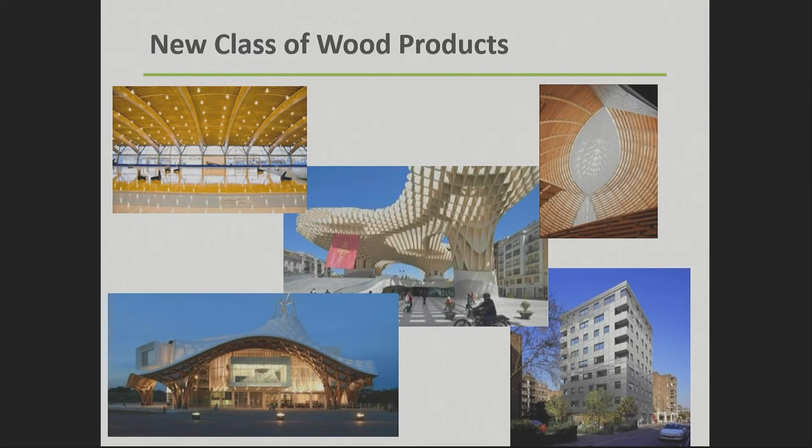The engineering software we have to model this nowadays is leaps and bounds beyond what we started out with. I actually started out hand drafting, so that gives you an idea how far back I go. Now with computer programs, you can just plug it in and it spits it out. It's like, oh, that's great.

So CLT is kind of the new word. It's cross-laminated timber, kind of the buzzword out there. But we're doing a bunch of NLT, nail laminated timber, just 2x's on edge. Lots of glue lam gets involved with these. And then LSL and LVL are big billet products.

So the demand for lower impact structures, the environmental footprint, is literally off the chart. It's so funny when people start running their life cycle assessment, figuring out the impact of the materials going into their building, and they actually run it and see like, whoa, wait, what? It's like 16 times, 24 times. On the water pollution part, wood is 1,900% better than steel. It's dumbfounding when you actually sit down and look at the numbers.

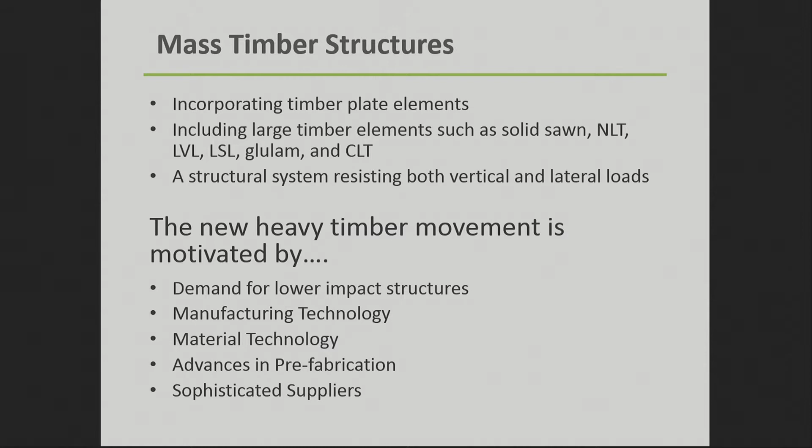Manufacturing technology, you guys have maybe followed D.R. Johnson, how they've gotten up and going. Valerie one day said to me, they went over to Europe and looked at a lot of the machinery and stuff, and they just didn't realize how far behind we've gotten in the United States. So now they have one of the top of the line CNC machines down in Riddle. I'll show you a picture of the press and everything. And material technology, that's advancing also.

So nail lam timber, we've been doing this all day long, a bunch of 2x's nailed on edge. It's a great product, very inexpensive if you've got cheap labor. That's where some manufacturers looked at making NLT in the rural areas and shipping it to the more developed urban areas. And LVL and glue lam, we've been doing that forever, and CLT is kind of the new kid on the block.

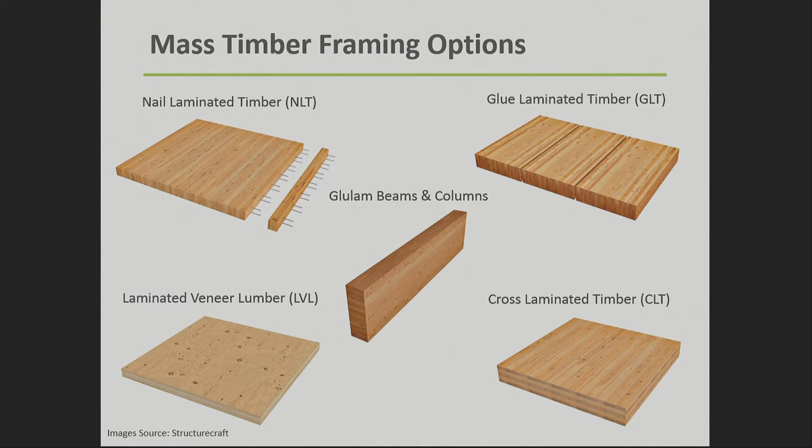So we're doing a little bit of everything. We're doing post and beam, glue lam posts, glue lam beams, mass timber floor plates, even just 2x6, 2x8 light frame with mass timber floor systems. And in non-seismic zones, we actually can do full-on mass timber walls with mass timber floors. High seismic zones, we can't.

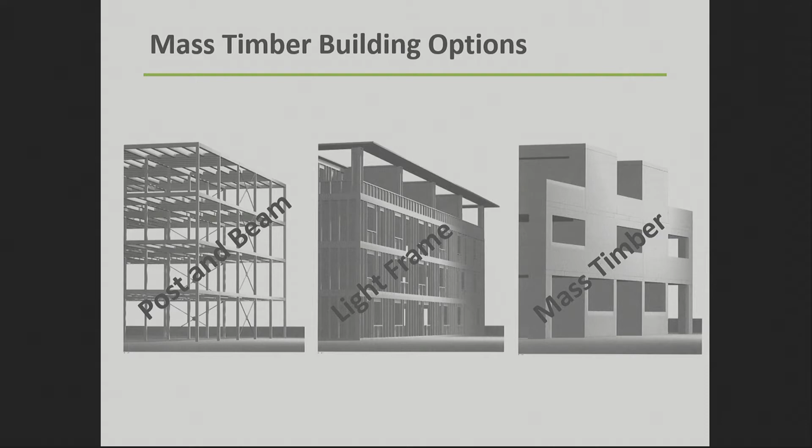One of the things that happens with this is everybody thought this was going to be really ductile and flex and bend in a seismic event, and it doesn't. It's just way too stiff. So on the 12-story, we're doing the CLT as part of a system. In that system we have steel rods at the edge that will actually flex and buckle and bend, and that's what absorbs the seismic energy.

In a non-seismic, wind-governed zone, it's super easy. The building just literally leans over and comes back. In a seismic event, it's moving back and forth, and the building can't absorb that much energy. But in a wind zone, it just leans over and comes back. That's why we can use CLT full on in non-seismic governed zones. Non-seismic is like Texas, Arkansas, Oklahoma, the whole Midwest, a good chunk of the East Coast. The West Coast, just not so much.

So here's a pretty picture of it. Again, 3-layer, 5-layer. Typically you see 3 layers on a roof and 5 and 7 layers on the floor, is what we're typically seeing in these projects.

These panels, again this is my scale model, only a 4-foot wide by 20-foot long panel. Normally these are 10-foot by 40-foot in length. So even my scale model, I couldn't make a full scale piece of the panel, otherwise I'd be carrying this big chunk of wood around. That gives you an idea how big these panels are. Typically on a building you're putting in a 10 by 40 panel, so 400 square feet every 15 minutes. That's typically what you're seeing on these jobs.

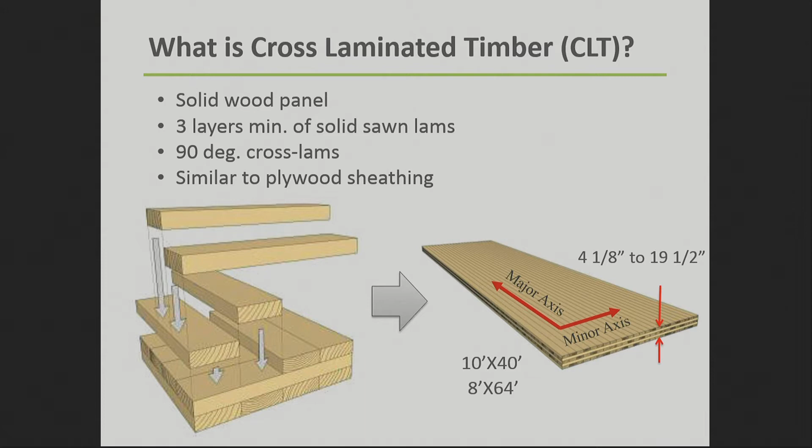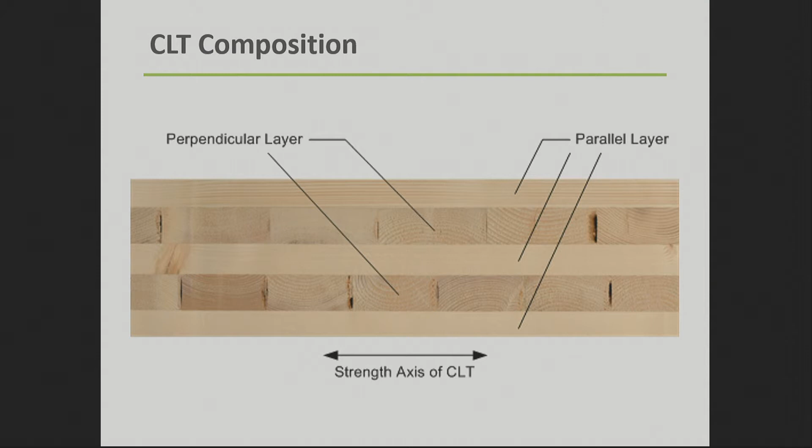The beauty is you need the strength in the outer layers. The inner layer is just infill material, and that's the beauty of it. You've got scraggly looking trees that aren't doing so well, and it's like, who cares? You need your strength in the outer layers, and this material inside can be whatever it needs to be. You can have wanes, checks, splits, things like that. Low grade wood in the middle.

It's all done to this PRG 320. The beauty of that is it's a performance-based standard. So as a manufacturer, you can make up the panel that's most effective for you.

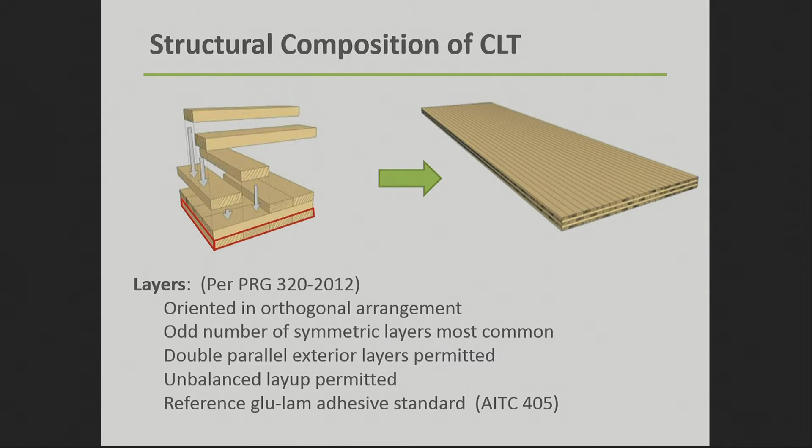Right now there are manufacturers that are—there's one doing a 6-layer panel, funny enough, because they found it more efficient for doing their fire calcs and everything. Since it's a performance-based standard, it just says this panel has to carry 100 pounds. You make the panel up. You've got their specifications in PRG 320 for how you glue it together and everything, but you just have to make your panel carry 100 pounds.

So there's not a specification that says you have to make it exactly this way. The beauty of that is it lets each manufacturer pick what's most efficient for them. It doesn't paint you into a corner to one standard.

So it's all done by APA. Again, how you've seen sheets of plywood with that APA stamp on there—it says APA 24/16 span rating, da-da—these panels are the same thing. It's an APA PRG 320 V1 grade panel. So the inspectors out there literally just go out and see the stamp on it, and you're good to go.

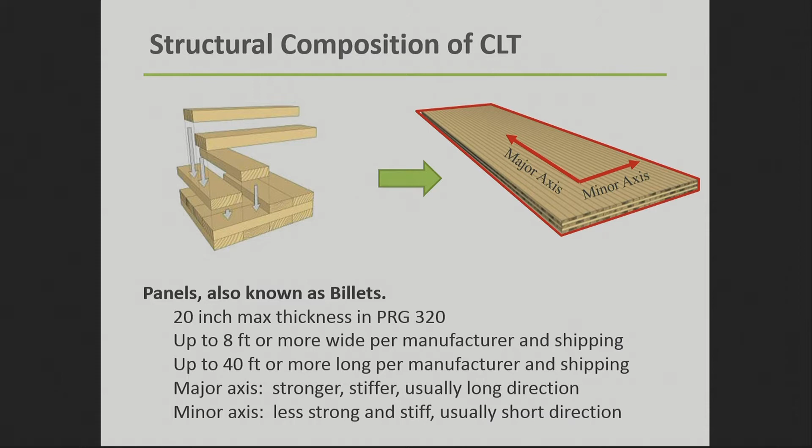There's always a strength axis and a weak axis. The nice thing is, say this was a roof system and you wanted a column out there and to cantilever this panel in a couple directions—normally we're running a beam out here to cantilever over the column, then running another beam along here to pick up this very edge. Now you just stick a column there.

This panel can actually cantilever on its own in 2 different directions. That's why we ended up using it on the roof at the Oregon Zoo, because it could just cantilever off this corner with no extra support, giving that architect the thin profile they really like to see on some of their projects. So that's been a big push for the designers.

They're manufacturing. Russ Vaagen's setting up his plant in Spokane, Washington. And then Katerra is setting up their plant in Spokane, Washington, but my understanding is they're going to keep that internal—they're not going to actually sell to third parties. So right now we've got 4, and then there's people like Columbia Vista that have been looking at it for a while. There's another group down in the southeast that's looking at it. Smart Lam just opened up a 2nd plant in Massachusetts, I believe, and a 2nd manufacturer is setting up operations in Massachusetts.

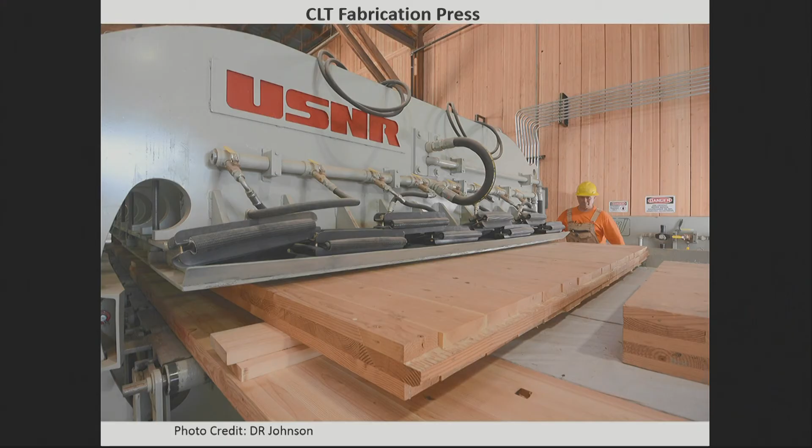So this is D.R. Johnson's press. Great story behind this—again, this is part of the governor's rural economic development deal that we were working on. One of the big pushes was using our local resources. A lot of people are getting their presses from Europe, and we said, hey, can't we get somebody in the U.S. to make a press here? So we worked with Oregon State University and their manufacturing group, and we talked to USNR, a local manufacturer of heavy equipment like this. This was great—a female engineer actually designed this.

It's really cool—this is a big plate here. Basically, you put the 2x down, run this screen of glue across the boards, 2x perpendicular to that, screen of glue. Then you roll it into this press, and this big plate presses down on the panel, and then it cures over time. So it's pretty cool to see. Some of the European manufacturers have just one single hydraulic press—like a custom-made piston that pushes down on that plate and presses the panel.

That thing breaks, you're down. You can't go forward until they get a new piston made, and they're very, very expensive. Some of the other ones over there will do like maybe 8 pistons, so they're smaller, and they've got a whole bunch just sitting on the shelf, but that's kind of money just sitting on the shelf waiting for a piston to break.

So when USNR did this one, the engineer was like, well, let's go low tech. Fire hose with an air clamp on it. Basically that's just fire hose clamped at either end. This air hose goes in and has a little fitting that connects to this fire hose. You just fill it up there, that presses that plate down and cures the plate.

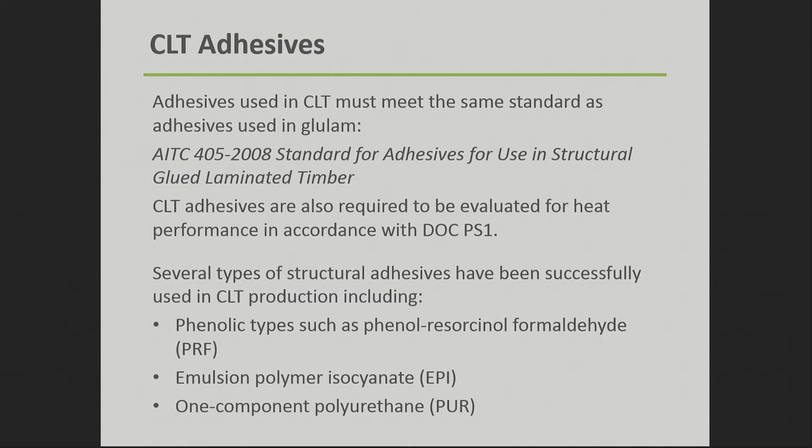So the CLT is really cool. Basically what the engineer and architect draws is what gets built, what gets fabricated. So on site, you're not cutting anything. I mean, door openings, window openings, duct chases, whatever, plumbing chases - those are all pre-cut, prefabricated.

So I call it an IKEA flat pack. If you've ever gone to IKEA and bought the bookshelf system, it's like, here's panel A, here's the screw, here's a little wrench, and you put it together - that's exactly how this is, literally. The panels come out, they've got a barcode on them, they're labeled, and your contractor will have a cut sheet that says here's where panel 1 goes, panel 2 goes, panel 3 goes. You basically just drop them in place, hand the guy the screws, hand him the drill, and he starts drilling. So super fast, super easy, very, very low waste on site.

Tolerances - the Hundegger that everybody's using to cut these panels has tolerances of 1/1000th of an inch. Then when the panel dries and moves and shrinks a little bit - it's done at 12% moisture content, so there's a little bit of shift in moisture content, but not like you typically see with wood products. The total tolerance movement on these panels is still less than 1/16th of an inch, which dumbfounds people using wood. They're not used to that precision.

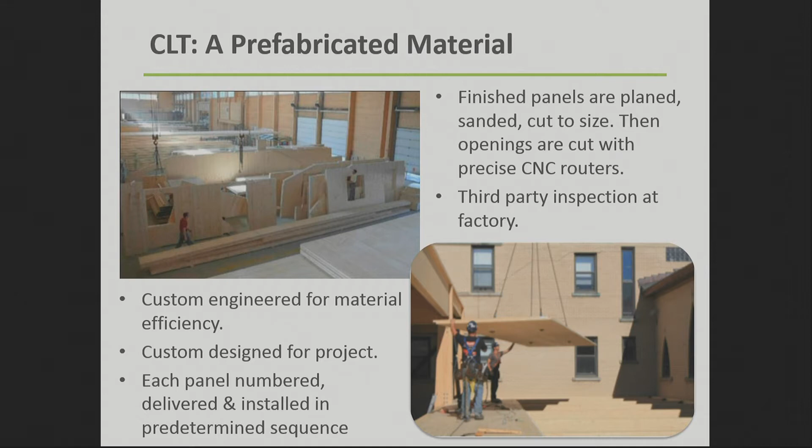Albina Yard in Portland was one of the funny stories behind that, because we went to the first floor and went to slide some panels in and they weren't fitting. Everybody's just like, these are supposed to be precise, what's going on, what happened with this? And it turned out - you didn't draw the fillet weld. They're like, what? So it was a steel plate, and it had a 1/4 inch fillet weld in there.

They didn't draw the fillet weld, so they didn't CNC the panel for that fillet weld. That's how precise these things are. So we actually had to route out that fillet weld in the field, and then we caught it on the next set of shop drawings. The next set of panels made had this little rivet cut out of them, and all the panels went in perfectly after that. So again, super, super precise, which is not something people are typically used to seeing in wood projects.

So pretty straightforward - wall system, if non-seismic zone, floor system, you drop in on that. That's one of the things with D.R. Johnson. I was sitting down with him, and they said, okay, we're going to do an 8-foot press. And I said, oh, no, you're not. They said, what? And I said, in the U.S. we still like to platform frame, which is what we call this, where you drop in a wall, drop in a floor on top of it - that's called platform framing.

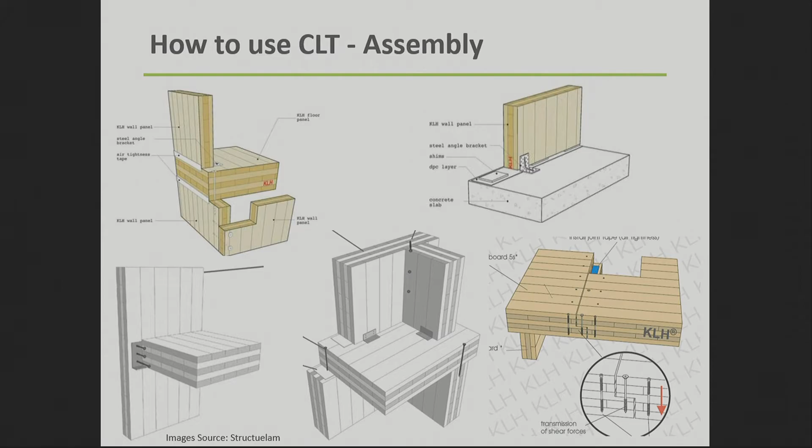We still like to do that a lot in the U.S. I was like, well, what happens if you make an 8-foot panel, and now you try to drop in the floor, now you've got to put lighting and all that stuff down to it, you're going to have like a 6'8" ceiling. Who wants to be in a room with a 6'8" ceiling?

So that's where I talked D.R. Johnson into a 10-foot wide press. Now you've got a 10-foot panel, you drop in the floor, now you've got a couple of feet, and you'll still end up with an 8-foot ceiling in there. So straightforward though - basically you drop that panel in, you start screwing it down, and you're good to go. They make these screws.

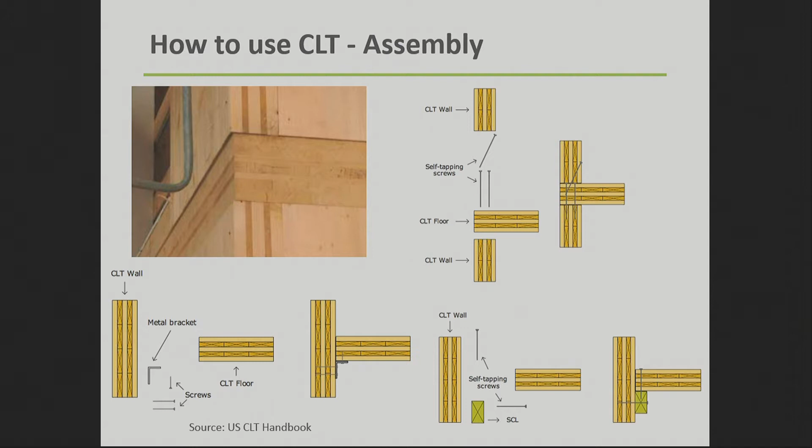So yeah, we just drop them in. You can use prefabricated - just have a steel fabricator make metal brackets. Simpson makes some of these brackets. And then it's just a bunch of screws, putting them together in whatever fashion you want. And again, that's what the architect and the engineer figure out - what's the effective way to design it, build it, and it goes along.

Building envelope - so this is like a wall section, floor section there. Wall section, you're going to have a membrane on there. You don't have to have a membrane on the inside in our heating climate, so the beauty of that is you can leave the inside exposed. Moisture will actually still migrate through the panel, it's just much slower because it's a piece of mass timber. But you still need a vapor barrier, and that's a water barrier, vapor barrier, that stops any rainwater from getting into the panel, but still lets moisture migrate out through the panel.

And then we have a standoff system that has exterior insulation on it, a standoff that holds the rain screen, and you can basically build it out from there.

So the beauty of these panels too is, again, super tight tolerances. Now you're putting a large panel next to a large panel next to a large panel - super tight envelopes. So you're getting passive house design standards out of this stuff, very low air leakage, which affects your heating and cooling. You'll see a lot of passive house in Europe - it's like literally to heat a room like this, they'll have a hairdryer-size HVAC system because the building's so tight. You just don't need these large MEP units because you're not losing all this leakage out through the walls from the structure itself. Now windows, that's a whole different conversation.

So floor system, this is like a little cutaway at the floor right here. So there's a CLT floor. We have to have a decoupler - any wood product transmits sound faster than steel and concrete, and so we always have to put in a decoupler. There's people that make this acoustic mat, or it can be like a cork fiber board in there.

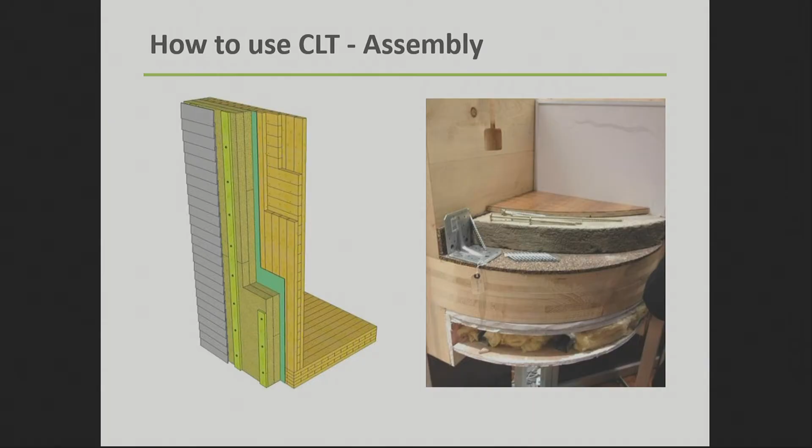And that's actually a lightweight concrete topping slab. Basically what that does is when people walk across the room, there's the heel impact that we account for - that's when people's heels hit the floor, and you don't want it coming back down to the people in the unit below. If you look at any of the equations on that, it's a fundamental component in the equation of mass. Wood's great because it's lightweight, but again, to dampen that heel impact, you need mass. So we're always having to put some sort of a lightweight concrete topping slab on there.

Right now, one of the things that is hurting us in this is - so this is a table showing the different panels, 3-layer, 5-layer, 7-layer, 9-layer panel, and this is the loading. Residential is only 40 pounds a square foot, then you go up to office, it's 50, and storage it's like 100 pounds a square foot. You'll see across this table, take a look at a 5-ply - 16 feet is the maximum span, basically about 16 feet is the maximum span.

Everybody's like, why is it 16 feet? Well, these panels are very strong, but they vibrate when people walk on them and you're moving around. So we're artificially holding them at shorter spans just so people are comfortable and don't bounce too much. So load carrying capacity, crazy load carrying capacity, but vibrational wise you've got to limit them to a shorter span so people don't get sick from the motion. That's what's hurting us at the moment, but that's where a lot of composite design is starting to come into play.

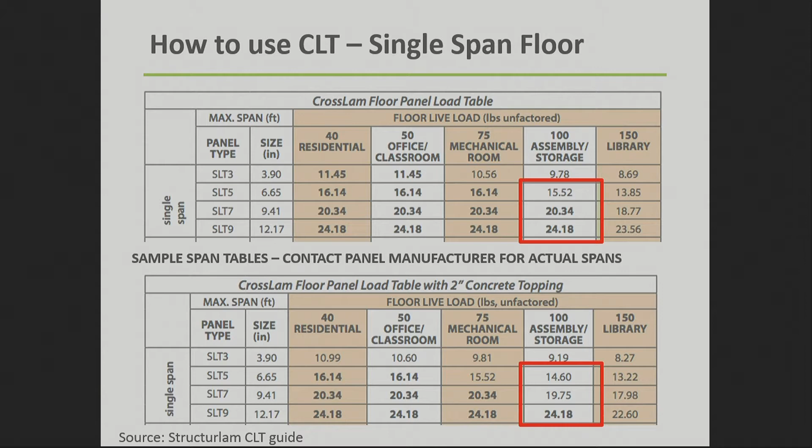So the Peavy Hall, we did some composite design on that. The UMass Amherst, we did some composite design on that, and more and more. So basically we're figuring out ways to... actually, I'll show you a slide later.

So embodied carbon, and again this goes back to that whole environmental footprint. Half the weight of wood is carbon. So when this tree is growing, it's sucking carbon dioxide out of the atmosphere to actually form the cells of wood. That's carbon. So it sucks that carbon dioxide, uses that carbon to form the cells of wood. Half the weight of wood is carbon that it's sucked out of the atmosphere. Every other building product exudes carbon into the atmosphere. So every 1 ton of concrete is actually exuding 1 ton of carbon into the atmosphere to make that. And now you've got one that's actually negative because it's storing carbon. Again, when you start trying to do your environmental footprint, wood wins out all day long.

And that's this number here, the avoided greenhouse gas emissions. Switching this building that would have been concrete, switching it now to wood, we actually sequestered 320 metric tons of carbon dioxide that would have gone into the atmosphere using other building products.

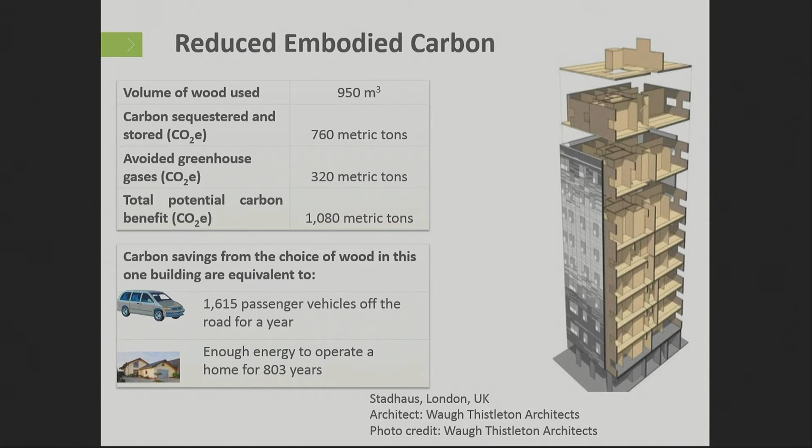And again you start looking at this, and on the architectural side of things we've got the AIA 2030 Challenge, which most of the big architecture firms have signed up for, that's reducing your carbon footprint by 2030. The Living Building Challenge has its own directive to reduce carbon footprint. You've seen Obama had his climate action plan to reduce our carbon footprint. So again, this is where this comes into play, and that's why people are starting to look at switching to mass timber buildings. Without that, we are definitely looking to do this safely. We aren't just kind of randomly doing this.

But the other thing on sustainability is the minimal waste production. Again, all these openings get cut out in the factory. Here's a perfect example - it's not a great picture of that slide, but we're not going to make this big panel and then cut out that huge door opening. That's actually a little glulam beam across the header there. So again, in the factory they'll make that really efficient.

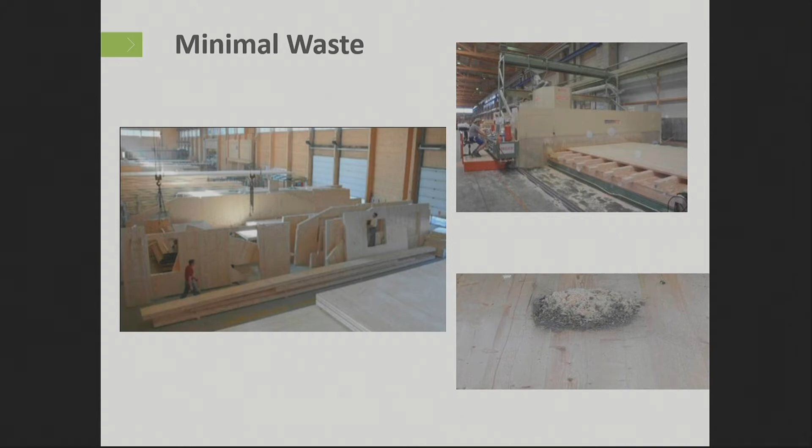Andrew Waugh is a buddy of mine over in London, and that 8-story CLT building he did, the on-site waste - all the openings and stuff he had to cut once he got on-site - fit in a 5-gallon bucket. 8 stories of wood construction, and your wood waste fit in a 5-gallon bucket? Unheard of. Usually we've got the roll-off and we're dumping in whatever. Yeah, and every week that thing's getting picked up, and that's how precise this is, how fast it is, and that's where we're like, whoa.

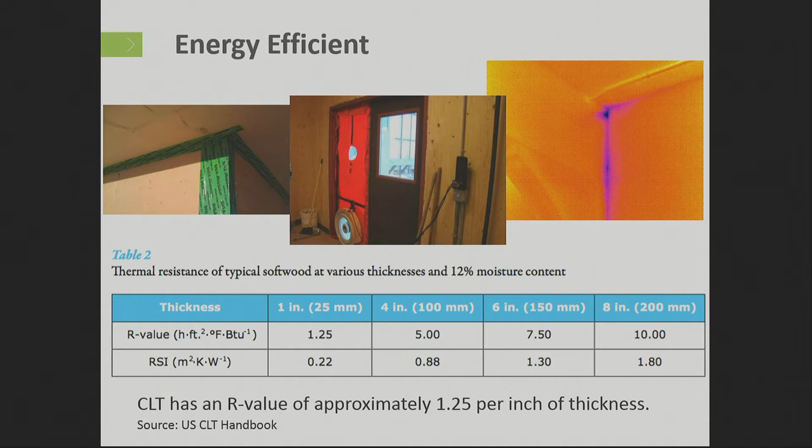And developer-wise, this is starting to save you money. I've got a project right now where we're looking at saving about $500,000 on one project just through the speed of construction, the lower waste, and things like that. Again, highly energy efficient, so passive house design, super great insulative values, low air leakage around these panels, and then disaster resilience.

This was a 7-story shake table test that was done in Japan. So that's a full scale, full 7-story building, CLT panels, again platform framing. So it's a wall system, floor system, wall system, floor system. And you can actually see up here at the top some of those Simpson connectors - these just have the Simpson clips on there. Then panel to panel is just using these screws.

And they went to go test this - this was a 7.2 earthquake. They went to test it and figured, okay, we're going to test it and something's going to snap, break, whatever. They tested it, nothing happened. Like, well, let's test it again.

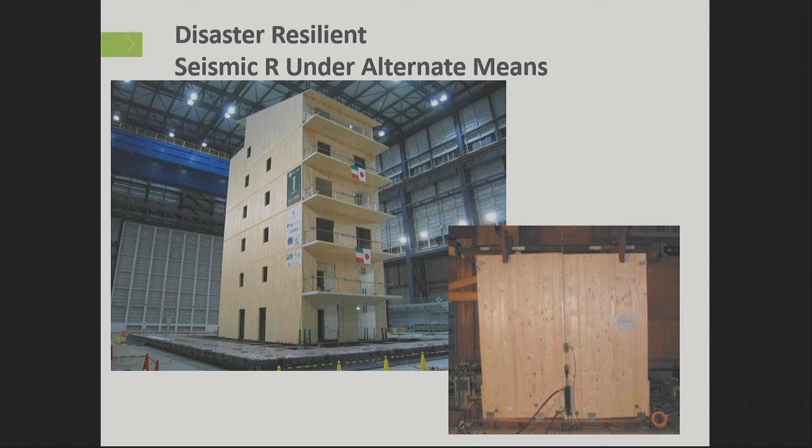But what happens up here at the top of the building, you want to see maybe about 10% of the energy of the earthquake. So your building, ground moves along, and you want it to absorb that energy and slow the building down. They were getting 75, 80% of the energy at the top of the building. So that's why we're not using CLT for our lateral system in high seismic, because you'd be on the top floor, and that wall that was there is now going to be here. And if your head's there, your head's now against the wall, that's what you don't want.

So super resilient, but that's where we've got to figure out ways to dissipate that energy out of it. And that's why we're looking at the rocking wall system that has post-tension rods, and the rods absorb that energy. But plain old CLT can't be a lateral system in our high seismic.

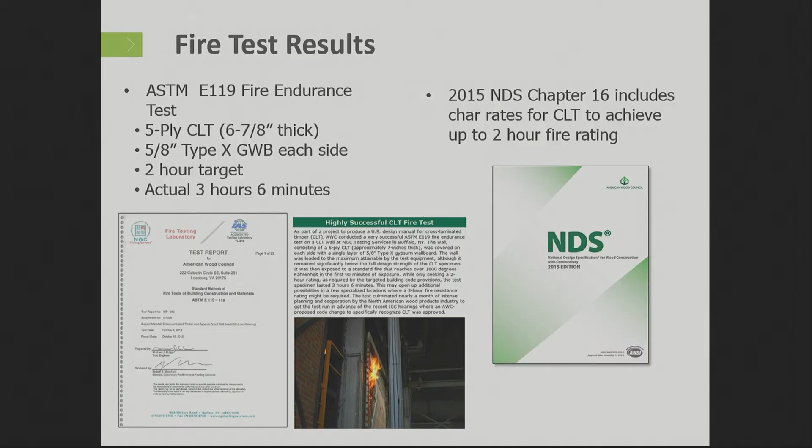Fire resistance, it works really, really well, kind of an eye-opener. This was a project where they were trying to do some area separation walls in a building, and so they just went out and did their own tests to start. They took a 5-ply CLT panel, 5/8 inch type X, and basically this is the sample there, and it has a piston pressing down load on it, 87,000 pounds of load, and they needed a 2-hour separation wall. They went and tested it, and they got 3 hours, 6 minutes.

And that's when everybody went, wait, this stuff really doesn't catch on fire, why aren't we doing this? And this one test was the big push for us to get CLT into the International Building Code, our U.S. building code. Even though it's called international, it's actually just the U.S.

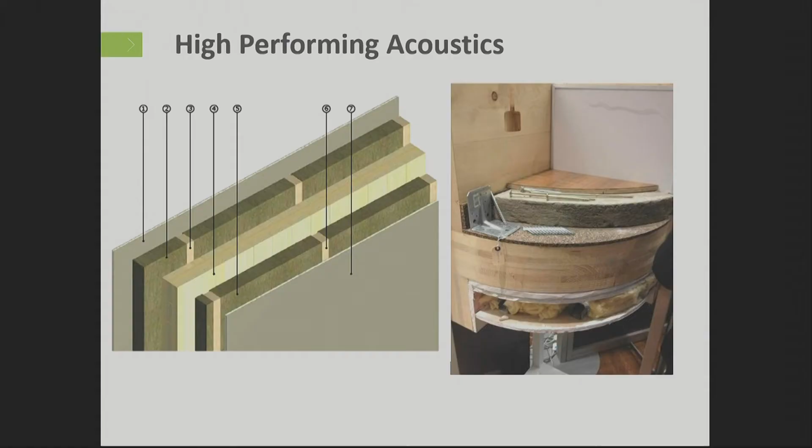Acoustic-wise, again, as long as we decouple and add some mass, it does really well acoustic-wise.

Structural flexibility, again, these are all square plates, but that doesn't mean you can't make a round building. It's all CNC cut. So one of the Norwich Academy projects, instead of doing 8-foot wide panels, they did 4-foot wide panels, and sectionalized it to make a round building. So you can make round buildings. You can do different things with it, you're not limited to that.

But this is what I was saying before. Normally for this cantilever, this corner of the building that's kind of hidden behind this slide, typically we'd be running a beam across those 2 columns. You'd have another beam cantilevering out here to pick up this corner of the roof. And here now you've got this column, and it's cantilevering in 2 directions just off the column. So again, it takes out a lot of that extraneous framing, saves us money.

And this is a perfect example of not saving money. They wanted to do it, basically, and it's a really, really cool thing. It's this HBV system, and it's a wire mesh rib that gets epoxied into the CLT. So this stair here, here's this run, a landing, and then the next run coming up. This is actually epoxied into the beam here, and then it's epoxied into the beam up above. There's nothing supporting this landing, it's just cantilevered out there. So they wanted to do it, and they proved that it works.

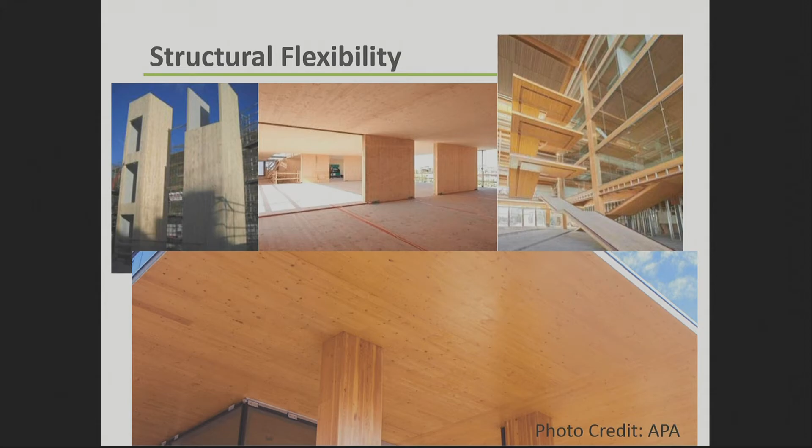It was about $300,000 just to do this stair, but it's kind of cool. You go stand out there, and as people are going up and down the stairs, it's not moving, it's not bouncing. So it's pretty cool to see, like, wait, we can cantilever wood off of other wood? How cool is that? So it can be done.

And then the other beauty of this is these buildings are 50 to 75% lighter than a reinforced concrete building. And that helps us a lot in the high seismic zone. So if you've got a big, heavy building, and the earthquake rolls along, how much energy that earthquake puts in depends on how much your building weighs, that building's trying to go with the ground. So the heavier it is, the harder it is to design your braces, design your foundation to move all that load. Now these buildings are 25% the weight of those buildings. Well, since the ground moves, the building goes with it. It just reduces our braces, it reduces our footing costs.

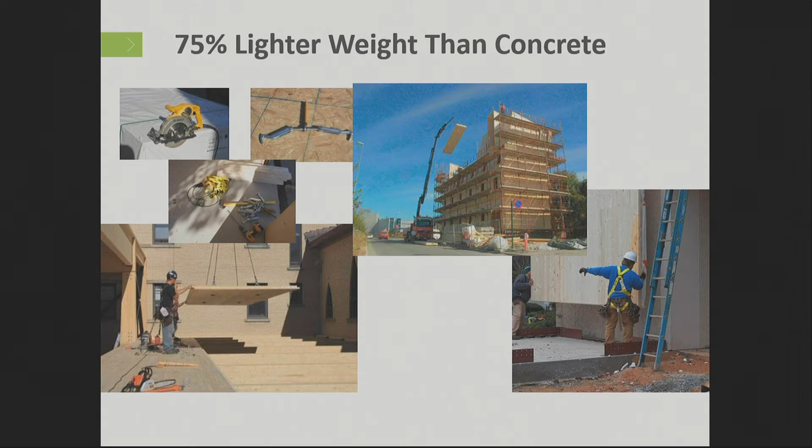You're trying to transfer that load back down into the ground, and that's helping us a lot in the high seismic zones on the West Coast. And again, reduced construction time.

I've talked about this before - 8 stories done in 27 days. The Brock Commons project took 9.5 weeks, and that wasn't just the mass timber frame, they actually put the rain screen on at the same time. So that was putting the building envelope, floors, columns, and everything in 9.5 weeks to do 18 stories. The best part of that story is UBC does a lot of the apartment projects there on campus.

They started another concrete dorm that they normally do on campus. The mass timber one was done, dried in, at 18 stories, while they had just gotten to the 4th floor on the reinforced concrete one they were doing. So you get an idea - they're done and dried in on an 18-story building while the full reinforced concrete one is just hitting the 4th floor. It makes you wonder, why aren't we doing that? It's a great story because now UBC's out there saying we should do this more often. This is what we should be doing.

So Franklin Elementary School - we can do 1-story, 2-story in our high seismic zone, possibly. This one's actually in West Virginia. What happens here is your building is still kind of just designed by base shear. So a low building, the earthquake comes along, the building's still just going to act like a box sliding on it. It's once you get multi-story, once you get 3, 4-story, that building wants to start doing this S-curve thing.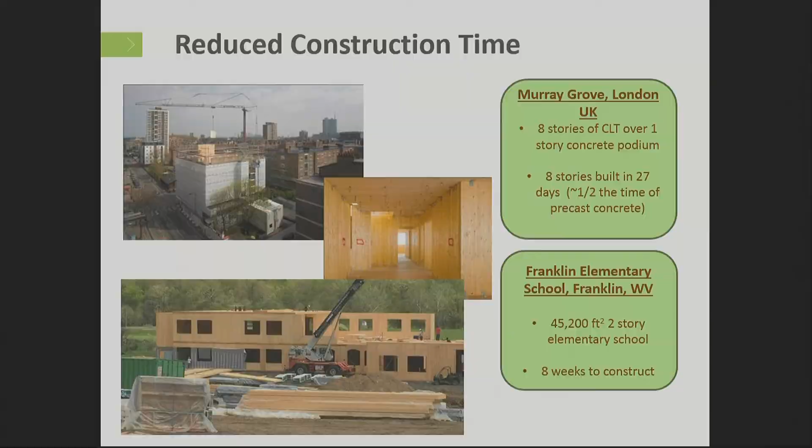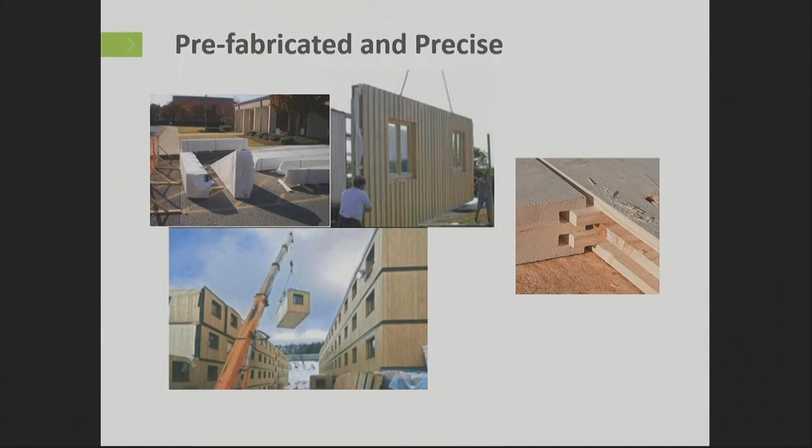And that's where CLT just doesn't make sense for lateral systems. So I actually do have some warehouse projects around here and a couple office buildings where we're going to use CLT for the walls and roof, because again, it's a short, flat building. It's just shear, we can take that. Again, super prefabricated, super precise - it's all CNC cut, you're not cutting things out in the real world.

So now I'm just going to run through some pretty projects that we've done. This was one of the first projects - a karate studio in Montana. One of the stories behind this, they were out there building it.

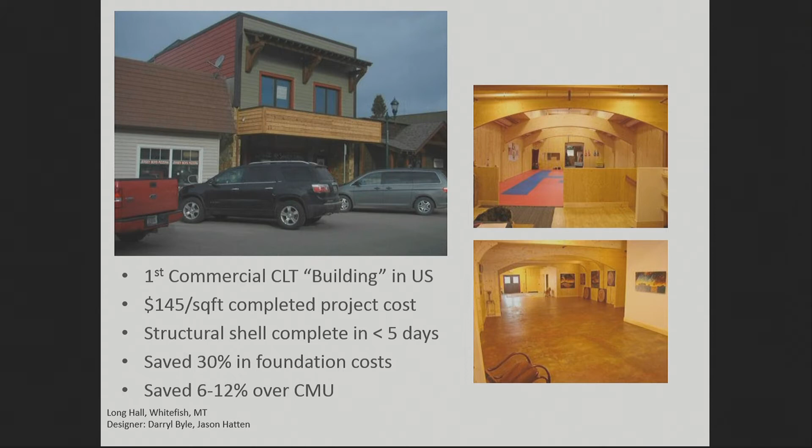It's just a bunch of people with screws. One day the neighbor came out and said, oh, you guys are actually working today? I didn't hear anything. Again, you don't have pump trucks and concrete trucks running back and forth - it's just a bunch of guys with some drills and a bunch of screws, and you've got a crane operator. That's it. So noise-wise on the construction site, it's super low.

This is Promega in Madison, Wisconsin. This actually connects two buildings. It's not a great picture here, but this forms like an S-curve. So again, it doesn't have to be a square box - we can do fancy shapes and basically sectionalize the panels to do a curved shape. This actually forms an S between the two buildings.

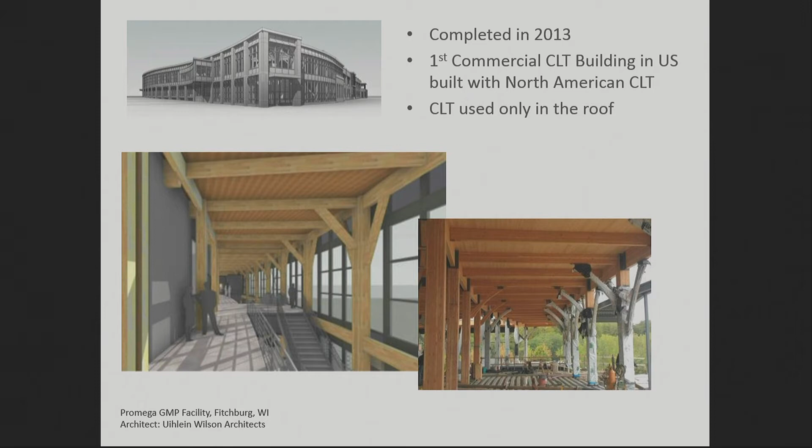But this is a perfect example - this is a composite concrete slab here. They had spans that just weren't working for the CLT, so there's nothing wrong with doing a hybrid building. There's nothing wrong with mixing materials. So that's a reinforced concrete slab, and then we use CLT for the roof, and glulam post and beam for everything else.

You can do nice square buildings too, nothing wrong with that. This one's down in California, and again, it's nothing new - cantilever in two directions, glulam post and beam. They actually wanted the steel columns out here just because.

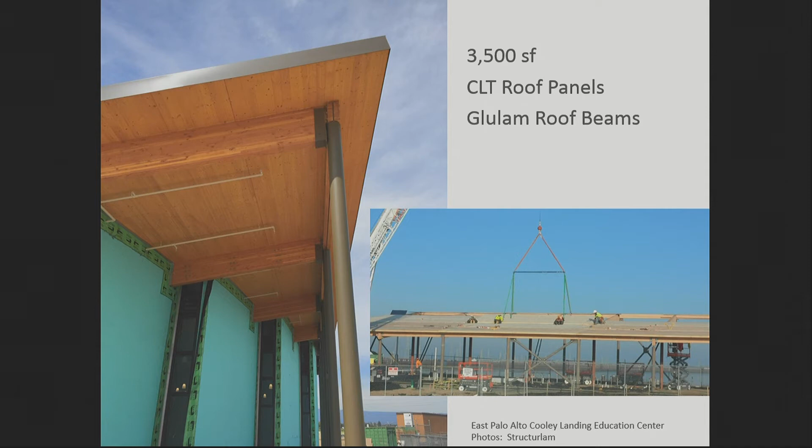Inside, again, it's nothing rocket science. A lot of people are doing exposed ductwork, exposed conduit - it just depends on the look you want. We are doing some projects where the conduit's actually run on top of the panel, so all you see is the junction box for the light from the underside. If the conduit's run on top of the panel, it just comes down to an outlet box, then your fixture covers up that outlet box. So you can see the conduit if you want, or hide it if you want - there's lots of different things we can do.

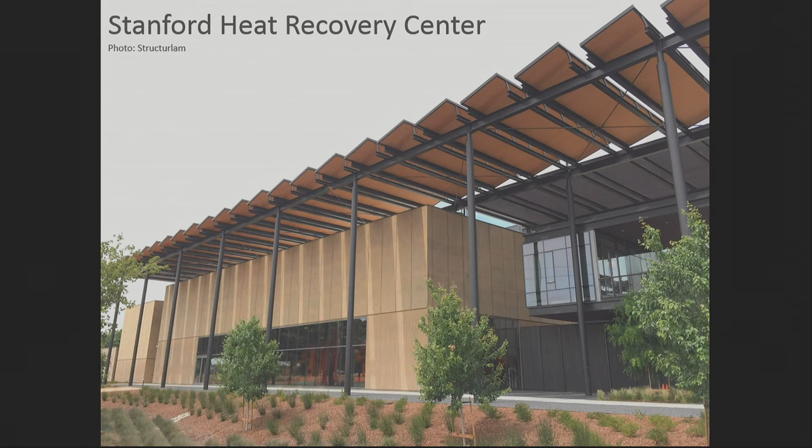Stanford Heat Recovery Center - just a bunch of big sun-blocking elements, trying to keep the building cool. CLT panels, so again, can be exposed to the outside elements. On top of this, it has light gauge flashing around it, and a roofing membrane on top of that, but the underside can be left exposed. Typically, we're putting a polyurethane kind of finish on there to keep it nice and clean.

Reduce the carbon emissions on campus by 50%.

How am I doing for time? Okay, so we'll run through pretty pictures.

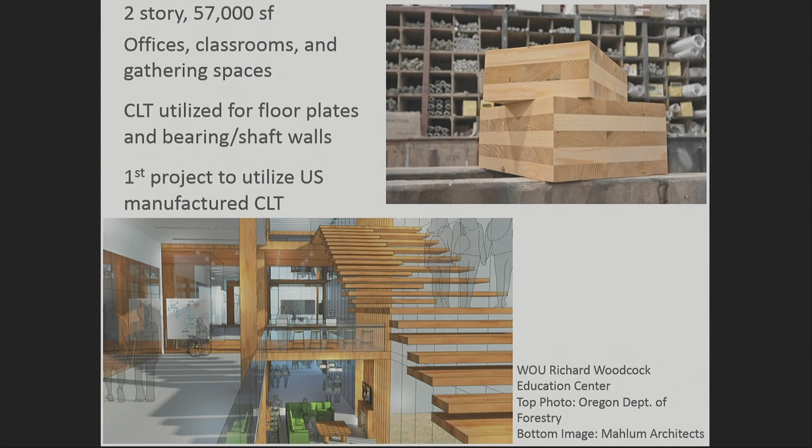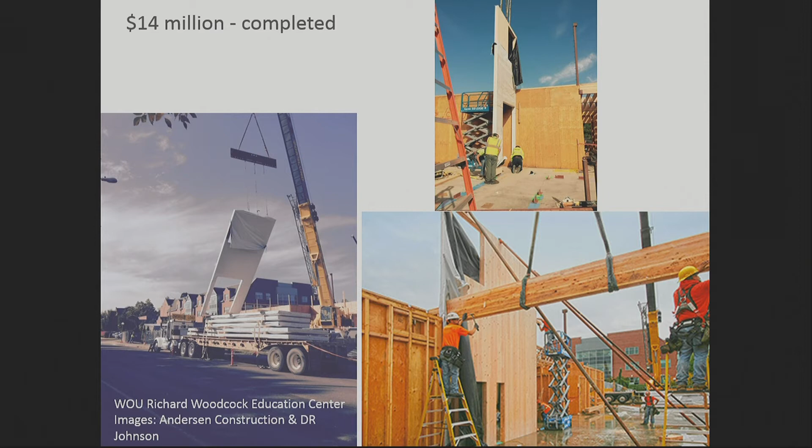With Oregon, we did the governor's executive order. Western Oregon University stepped up to be one of the first ones to follow that. CLT is very expensive and they had a really low budget, so we only ended up using CLT, mass timber, at just one little area of the building. The whole rest of it's light frame 2x material, so again, we can mix and match.

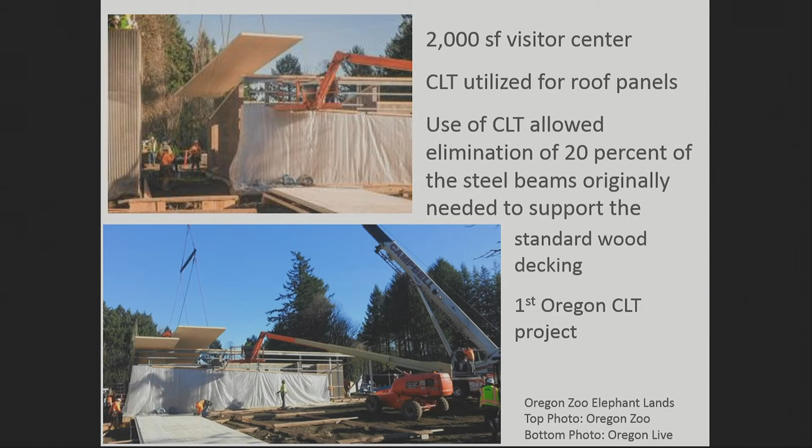This is the Oregon Zoo project, just a small elephant enclosure. Again, rubber tire cranes lifting these things in place. They're not real heavy, super easy, super fast.

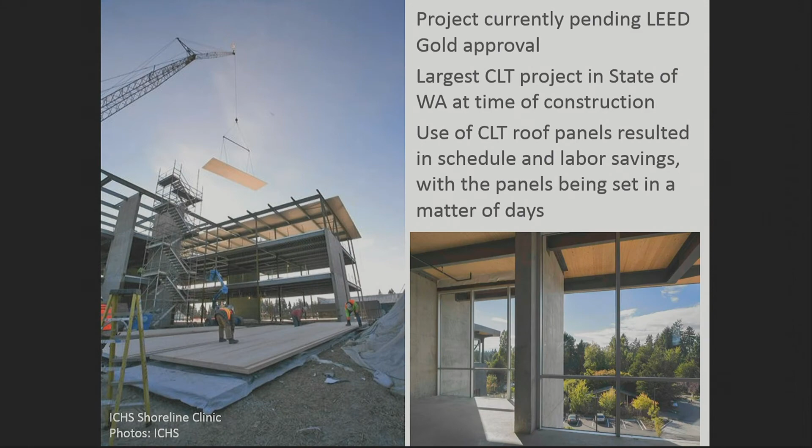Strap them down. ICHS, this is up in Washington. Steel frame structure, and then cantilevered CLT roof beams on it, so it can be high-tech offices if you want. We can do a little bit of whatever you want. You want to do a manufacturing facility? Here's a manufacturing facility. So we can do office buildings, we do manufacturing facilities.

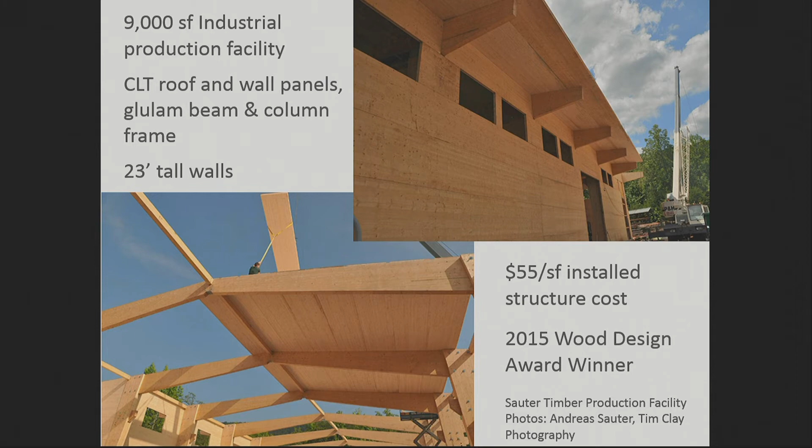This one's over in Tennessee. What he's doing is buying panels from Europe, then doing all the CNC work here in the United States, and building the building. In Tennessee, he did that super cheap, $55 a square foot installed was his price. West Coast, we're typically a little bit more expensive than that, but not much.

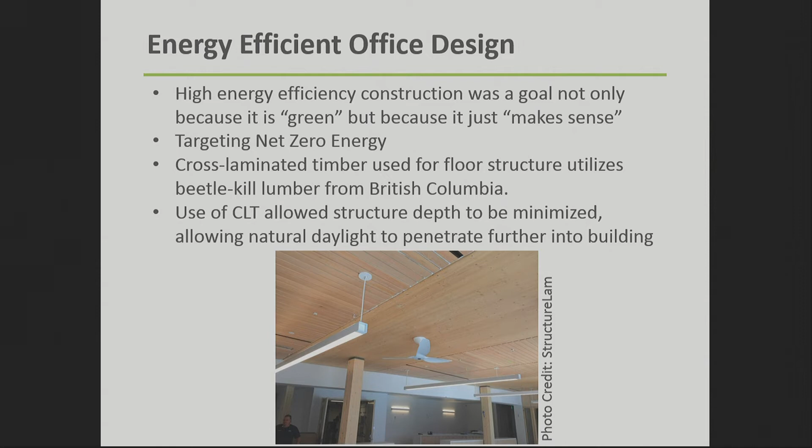Rocky Mountain Institute, high energy, net zero building. Again, when they tried to run their carbon footprint, wood was the only answer. It's the only way you can get to a net zero energy building.

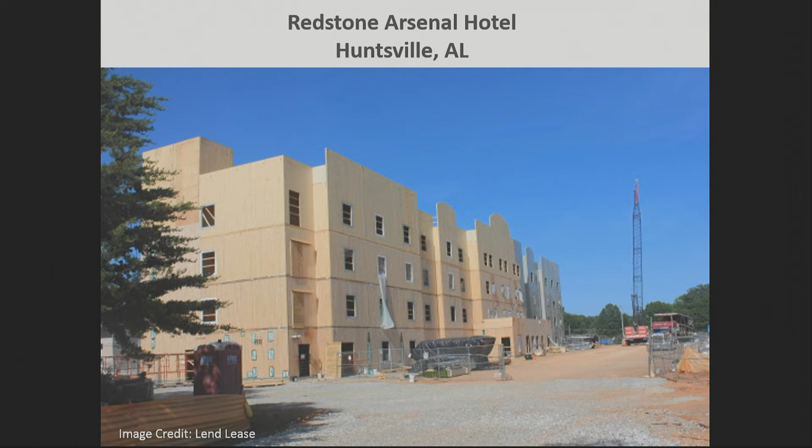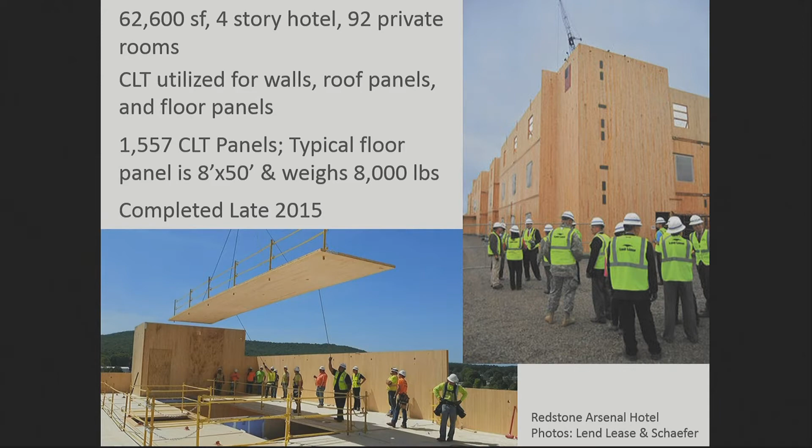This is a hotel in Alabama. One of the beauties of this, we're doing a lot of work with the DoD on this. Blast resistance, any building on a military base has to be blast resistant, so we did a bunch of testing with this and it worked amazingly well. Very robust strength-wise. So they did one last year, they're doing 5 this year. Lend-Lease is. So non-seismic zone, just wind governed. It does really well, just leaning over, coming back.

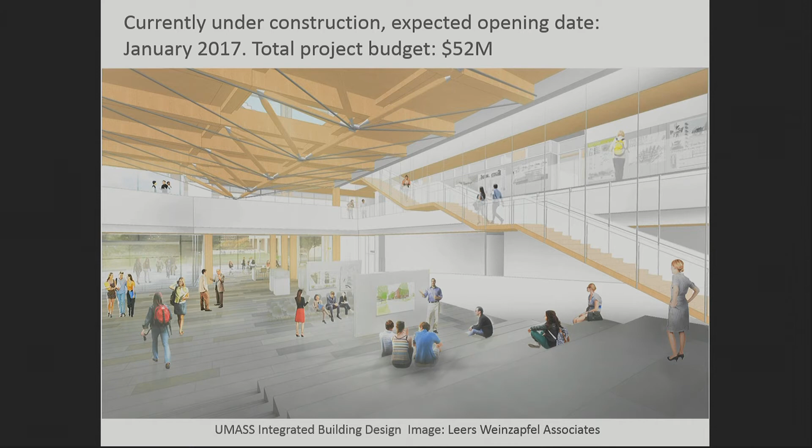UMass Amherst, this is a high-tech building. I've got to update these pictures, this building's done now, all I have is renderings up. But they did a lot of stuff on this, and this is what I was getting to earlier.

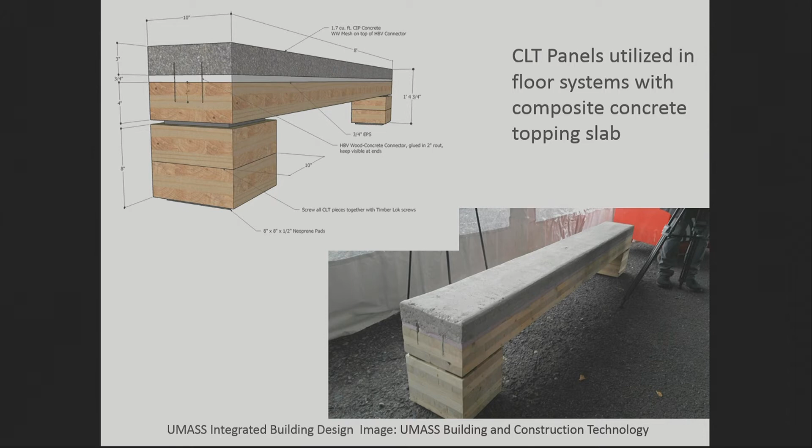Composite design, I think, is going to be the answer. The composite design gets rid of that 16-foot vibrational deal. What you're seeing is a metal rib, that's the HBV system. That metal rib is halfway in the panel, then halfway in the concrete, and that metal rib makes the concrete and wood a composite. The concrete is good in compression, wood's great in tension, and that takes that 16 feet and probably puts you at about 23 feet that panel can now span. So when this gets worked out cost effectively, it'll work.

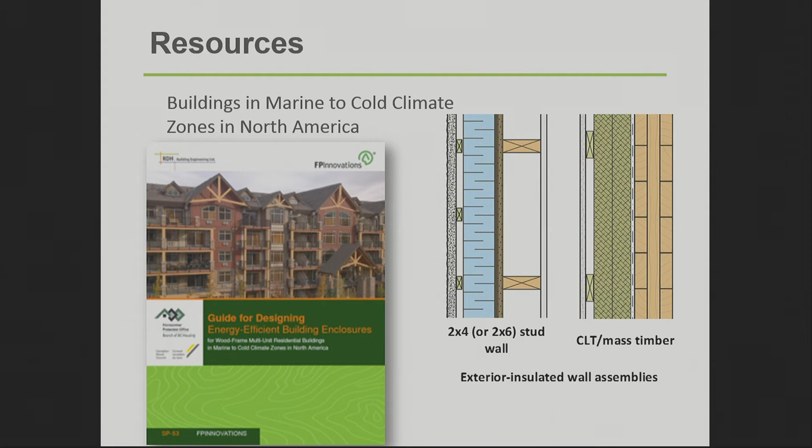We won't get into that. We have a building envelope design guide that tells us here's your panel, membrane, insulation, rain screen. RDH has put this out, so it's free for architects and engineers trying to figure out the building envelope. We, Woodworks, and some other organizations put together a CLT handbook, also a free PDF, with chapters on everything: vibration, creep, fire, and sound.

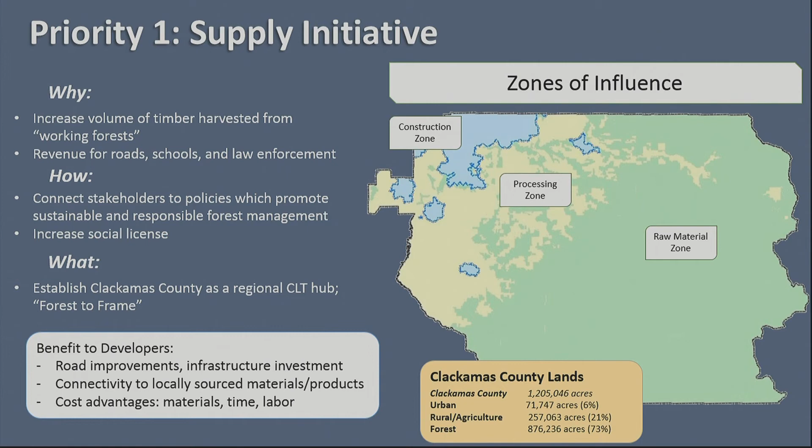As Ethan mentioned, there are significant cost advantages to building with the material. And if you're pulling the lumber from this part of the county, processing it here, and building with it up in the construction zone, you're seeing additional cost savings on top of that.

So the second priority we're working on is specifically with our building codes division within the county. Scott and his team are leading this effort. We're monitoring what's going on with the IBCs, those international building codes, as they're being adopted. We think they'll be codified here in the next year or two. There's a big election coming up among all building code officials within the next year or so that the whole Portland metropolitan region is getting involved with, to vote on ratifying and allowing CLT buildings to be used in the IBCs. But why are we doing this?

Specifically, we want to attract CLT construction to the region. How are we going to do it? We're going to work with our building codes officials who already have experience with these prescriptive pathways. And then what are we doing? We're branding Clackamas County as a destination for mass timber. And all of that adds to the benefit to developers, the ease of production, the ease of construction within the region.

And that's really what it comes down to, the bottom line: making sure it's easy to build with this material. We all know the added benefits of it, but if it's easy to build with and it's going to cost less, that's what's going to get the stuff built with.

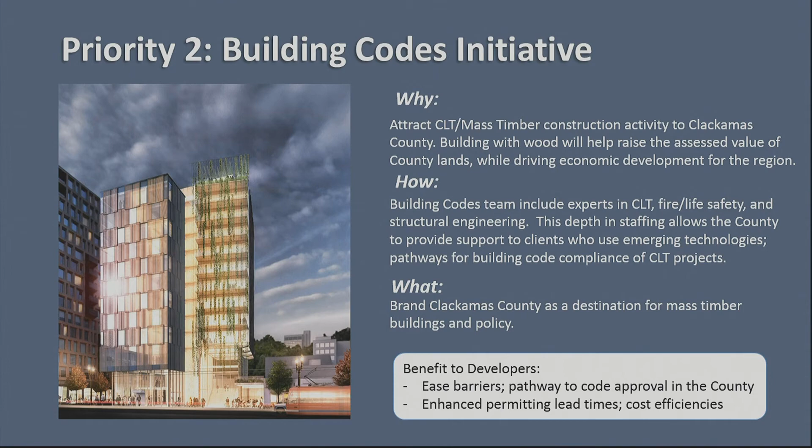Finally, our third priority is our investment strategy. We're going to foster public-private partnerships, utilize all the tools in our economic development toolbox, everything the county can leverage to encourage production manufacturers and building developers to come to the region. So why are we doing this? We want to bring mass timber processing to the region.

We want to use new market tax credits, enterprise zones, and there's something new that's just gotten on the governor's radar. It was passed in the last tax bill, in the last tax season, called the Opportunity Zone, and it essentially works as a 1031 exchange. Clackamas County has submitted to the governor several regions that are significantly economically distressed within our county that would qualify for this Opportunity Zone, allowing for specific strategic investment into those regions. That would be used to target a developer or a large-scale manufacturer to the region.

And then what are we going to do? We're going to develop these public-private partnerships to help with those depressed communities. How does this all benefit developers? It's an opportunity for public-private partnerships, it allows for different incentive initiatives, and it increases the skilled labor workforce here in the county.

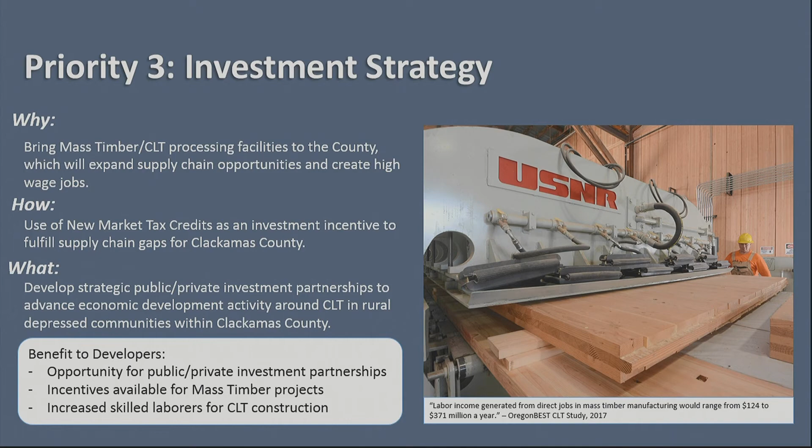I'll talk about this in a minute, but we actually have a meeting later this afternoon with Clackamas Community College. One of the questions brought up was what sort of union labor is being used to build with the material, and Ethan answered it. Up in Seattle and around the region, they're using union labor forces.

I know the Carpenters Union specifically in the region is interested in actually establishing a CLT workforce. We're having a meeting later today with Clackamas Community College to start investigating whether or not we can begin an apprenticeship program at the community college to build with CLT, not just to construct it, but to have the local workforce here so we can establish Clackamas County and the surrounding region as a CLT leader. All in all, this leads us to: Clackamas County is open for business.

So we have a couple of opportunities that have emerged over the last couple of months. We've got a DTD-owned site that's interested in selling off and encouraging CLT production. We've got our employment lands, employment zones, and enterprise zones that are part of our investment toolbox. We're building a new Clackamas County courthouse, and we want to use CLT for that. Across the way, they're going to be building an OSU extension building, and CLT was submitted as part of the architecture design for that building as well.

In the city of Milwaukie, Coho Point at Kellogg Creek, right as you're coming in on 99 heading south through Milwaukie. Some of the newest construction - there hasn't been a building built in the downtown core of Milwaukie in 15 years, I was told. Kellogg Point, Coho Point is going to be a CLT building down there.

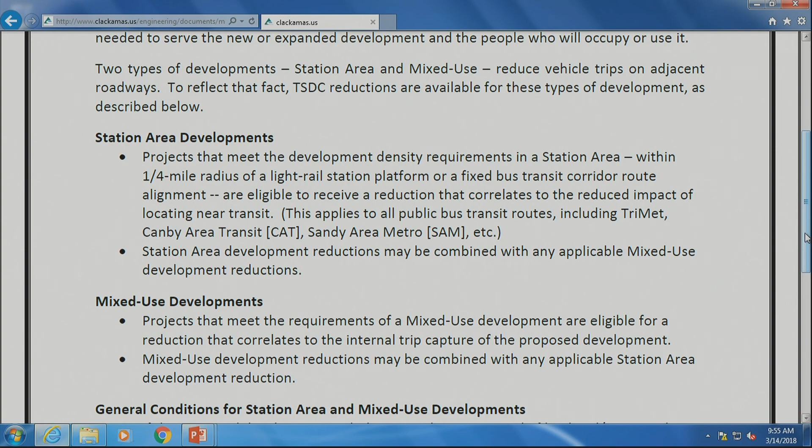If you know anything about these fees, they can be pretty expensive. One handout coming soon that isn't on here today covers our installment plan option, where people can do a payment plan if they can't pay the full fee up front. It's called out in the code, but it's difficult to find, so we put together an easy to understand handout to walk people through how that works if you're interested during the building permit process and don't want to pay in full, including who to contact. We'll get that up there before the end of the day today.

Really, that's what I wanted to come talk to you guys about. I have a stack of business cards in the back if anybody wants to delve into our process on how we did our update, or if you have questions. But do any of you have questions for me today?

Just kind of curious, I live in the unincorporated areas of Clackamas County. I've noticed quite a few private streets, despite the fact that they have more homes on it. Is that something that's been talked about in terms of they're all paying the same SDC fees, but yet they're going to be required to...

So the transportation system development charge cannot be used for maintenance in any way, shape, or form. You can only build new facilities with it. One of the decisions and criteria we determined as a work group was that we wanted to focus on arterial, collector, and connector roads, those larger roads moving more people through the county, because it's more likely everyone in the county is going to be using those facilities. So you're not going to find a local road on the list, because local roads are exempt — you can't use system development charges to pay for the construction of a local road per state law. You're not going to find a project or road that small on the list. As far as maintenance, that's a separate conversation from the transportation system development charge, but it has been at the forefront of our development review conversations recently.